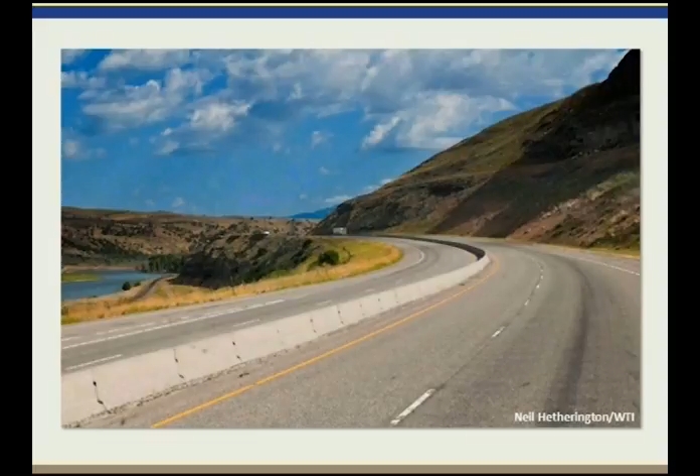There are 4 main ways that roads and traffic impact wildlife populations. Rob's section will mostly deal with number 2, vehicle collisions, and Tony's section will hit on all 4 of these impacts. Perhaps coincidentally, perhaps not, several of these might look familiar to you as key priorities for federal agencies, in that they focus on resource protection and transportation.

Despite their usefulness and arguable necessity, once a road is there, it becomes something to be managed, and it's a challenge to keep negative impacts to resources at a minimum.

Every road building effort affects the suite of species that once relied on that plot of ground. New edges are created with different temperature and moisture regimes and other environmental variables that affect habitat quality for hundreds of meters in some cases.

Every road represents habitat lost and some degree of decreased habitat quality. This is a given, but it's easy to forget as soon as you start cruising down the road. But the regular maintenance and use of roads can also affect habitat quality. Chemical additives, while making for a better ride, can impact wildlife.

Stormwater runoff can carry polluting substances from cars and maintenance activities to nearby waterways, which can affect aquatic organisms and then the animals that feed on them.

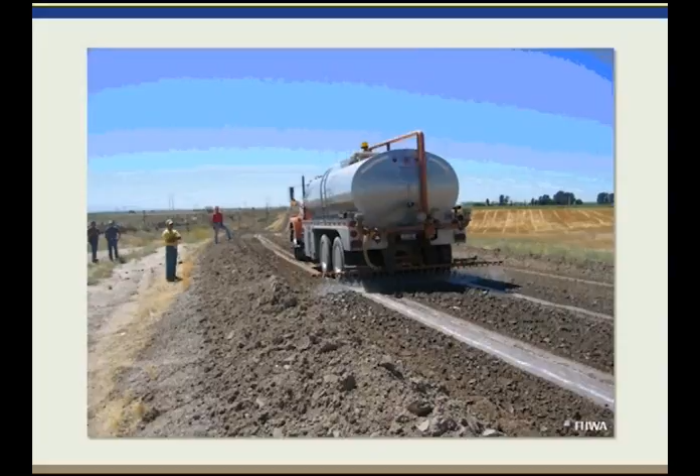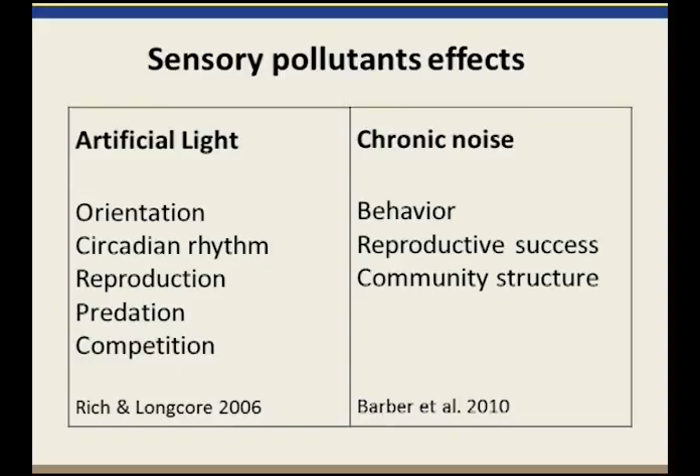No less important to mention are the influences of artificial light and chronic noise. Sensory pollutants can upset natural rhythms and biological processes. And even when alternative modes of transportation are used, the road still needs to be maintained at a certain environmental cost.

The second main way wildlife is affected by roads is by collisions. Because it's a pervasive problem for a wide variety of animals, I'd like us to take a moment to get on the same page that countless animals are struck by vehicles every year. We may never know how many, because they often go unreported or nobody's counting. Or even if someone is counting, things can get complicated quickly because of scavenger bias and searcher bias.

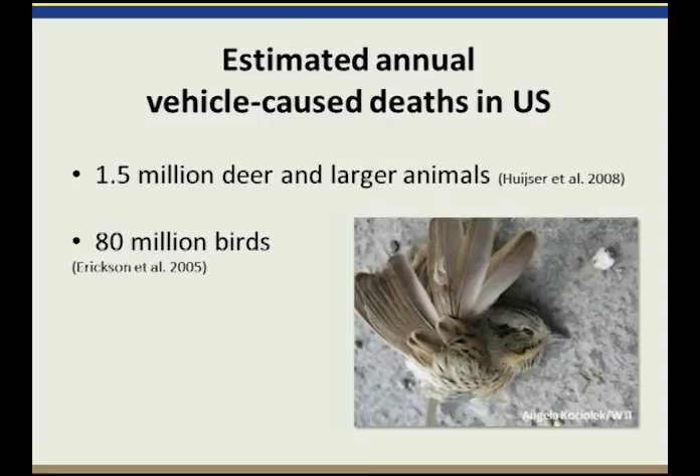Okay, so here's a little pop quiz for you. Can you guess the estimate for how many vertebrates, mammals, birds, reptiles, and amphibians die on U.S. roads per day? Cast your vote if you would. I'll give you a second to do that. Okay, Angie, I'm going to close the poll and show the results.

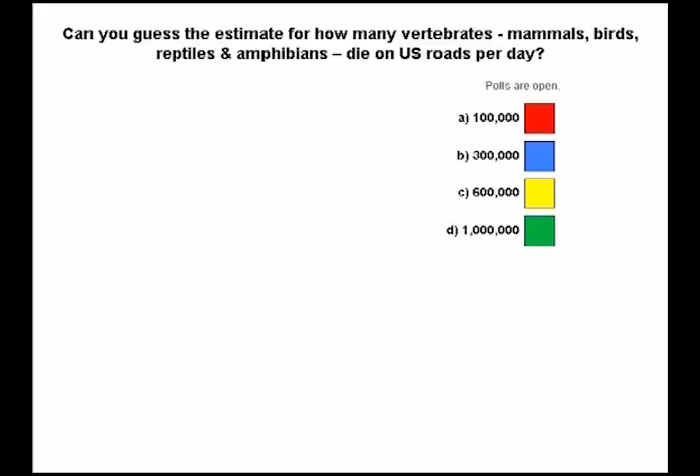Okay, it looks like most of you are pretty optimistic, estimating about 300,000 to 600,000. Okay, Amber, if we can go back to the presentation. But if you guessed D, 1 million vertebrates are estimated to die on U.S. roads per day, then you were right, unfortunately.

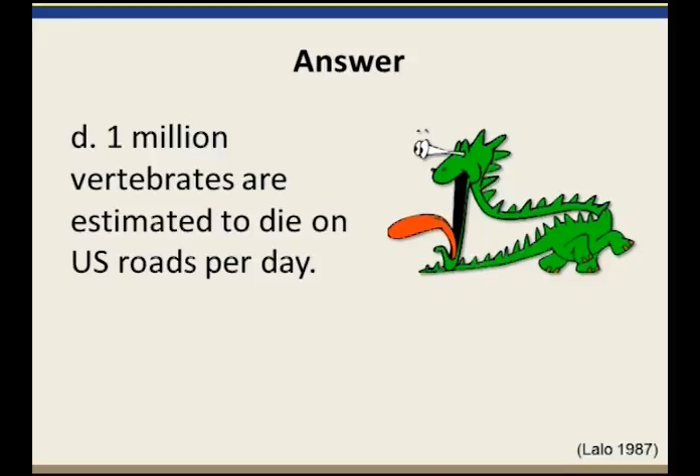It sounds like somebody's having a party. I just want to remind you about your mute function there.

But we may never know how many animals really are killed by vehicles. And does it really matter? Does it matter if animals are killed by motorists traveling through your park, refuge, forest, or grassland? That's a question for you and your agency to ponder.

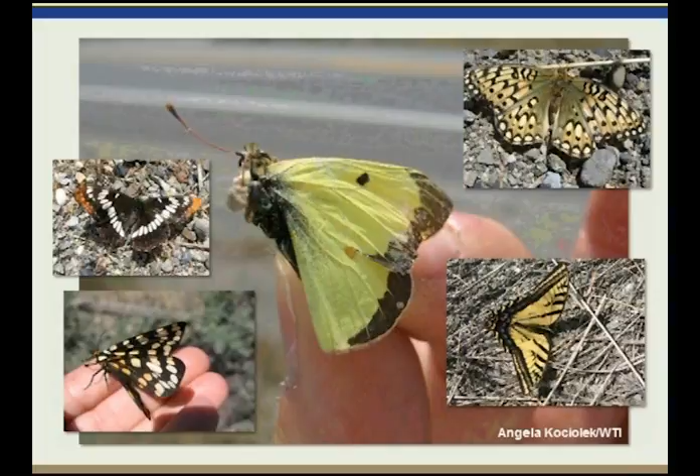The third main way wildlife is impacted is by limited access to resources. Roads help us get where we want to go, but from the wildlife point of view, roads can represent an obstacle from getting from point A to point B, whether it's to access resources or mates, to migrate, disperse, or meet some other biological requirement. Some roads may be physically impossible for some animals to cross due to concrete median barriers, for example. Tony and I did a project a few years ago looking at various barrier types that are used along roadways to prevent or reduce head-on collisions.

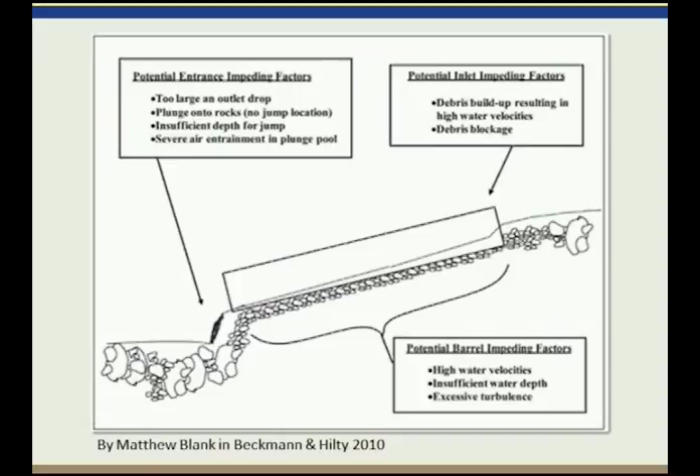The impacts of roads are not only recognized by individual researchers, but the National Research Council of the National Academies have also looked at the issue.

Bringing us to the fourth main way that roads and traffic impact wildlife populations: fragmentation and isolation.

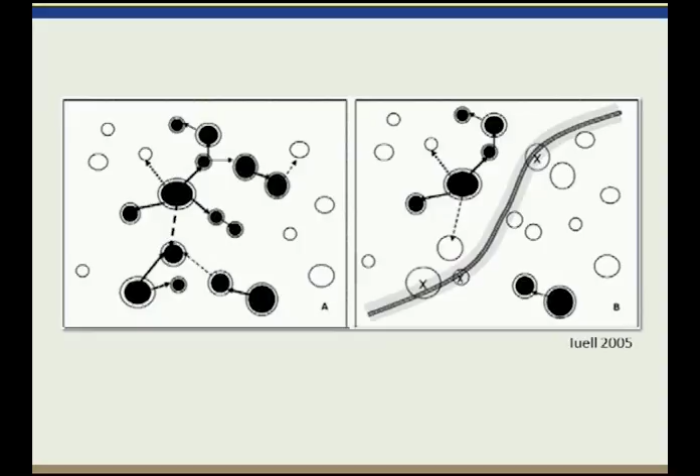Large mammalian carnivores are vulnerable to road effects because of their great mobility and extensive spatial requirements for survival. But small taxa with patchy and localized distributions are also vulnerable to the fragmentation effects of roads.

So these were the four main ways that roads and traffic impact wildlife populations: reduced habitat and habitat quality, vehicle collisions, limited access to resources, and fragmentation and isolation.

So you might be asking yourself, what can one agency do to mitigate the effects of roads on wildlife? If we look at examples from Washington State across the country to Florida, there are examples of FLMAs that are working side by side, or have worked side by side, with DOTs.

In Washington, the Snoqualmie National Forest, for example, is working with WashDOT on the I-90 reconstruction project to benefit all wildlife that live in the corridor.

Big Cypress National Preserve in Florida in years past has worked to reduce panther roadkill mortality. And I'm sure there are other examples out there.

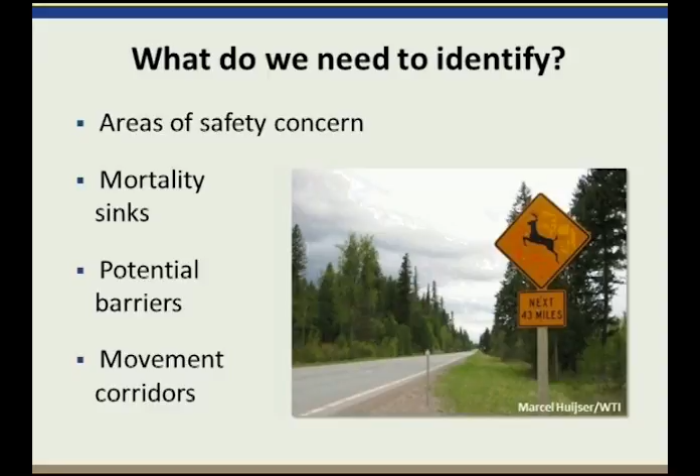This whole issue of wildlife vehicle collisions is always a front page story. I was just talking to my sister yesterday, and she lives in Illinois, and she said there was a big story about wildlife vehicle collisions in her local paper. We tend to see this every year as the insurance industry does a summary.

I suspect you're probably wondering where your state or your land management unit sits within this issue. So what I've done here is give you a few moments on this next slide to see where you sit. This I peeled off the website from State Farm. Last year is the most up-to-date information.

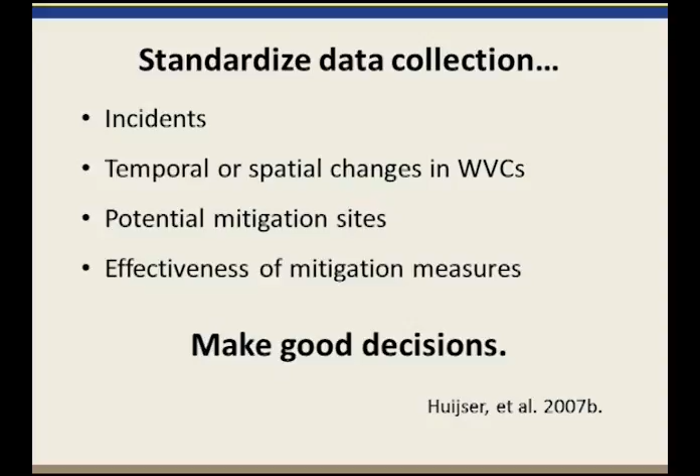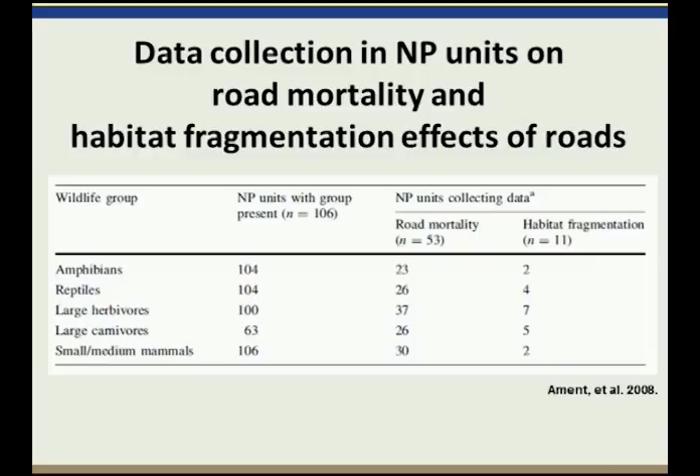So what we are developing is this roadkill observation collection system to improve and standardize the animal vehicle collisions, AVC, and animal carcass data collection, AC. The AVCs are primarily collected by law enforcement agencies or maybe park rangers, for example. The animal carcasses, the dead animals being removed, are primarily collected by maintenance crews. A lot of this information today is being collected on paper and being warehoused rather than entered each year, as we've talked to different agencies. So we do want to collect good, reliable information and data.

This system will be easy to use. We're in the 4th phase of its development. We make it so that you can quick look at your data on your personal computers. It's also automatically stored, so different agencies can share out of the same database once you're granted access.

I'll just show a couple quick examples of how, if you collect good data, you can do a spatial analysis and now a cost-benefit analysis as well, now that we have those numbers. This is what the original unit looked like with the personal digital assistant and the GPS unit plugged in on top. These are all the sponsors of this: Federal Highways, Federal Lands Highways, the Deer Vehicle Crash Pool Fund, which is 10 state DOTs, as well as Washington and Virginia. So there's a very broad interest in getting good information and developing this system.

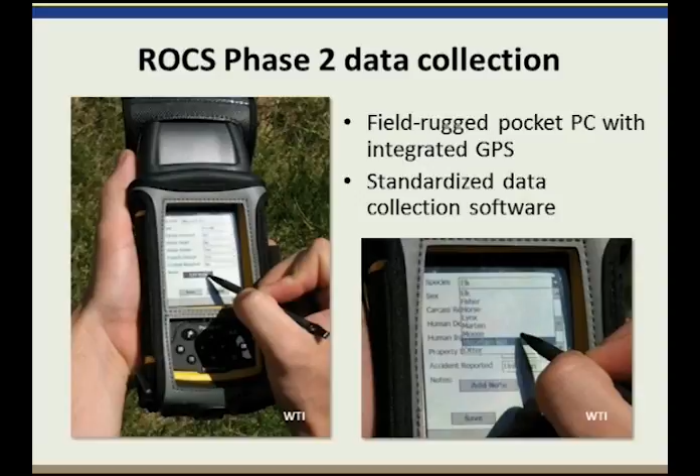The last thing we're doing now is creating a free smartphone app, because those units are $1,500, and when we realized for agencies to deploy broadly it was effectively becoming cost prohibitive. So we're trying to get that same system going, because smartphones have such good GPS. All the data is within 3 to 5 meters instead of the old mile marker system. We're trying to get the app going this year.

This is what it would look like if you came to the ROCS website to look at some of your data. Each of these bubbles is where we had a test unit collecting data. You can go to the website and use the filters, maybe only look at data from a particular year or species, and it will sort it for you. Then you can export it and take it back to your personal computer out of this central server.

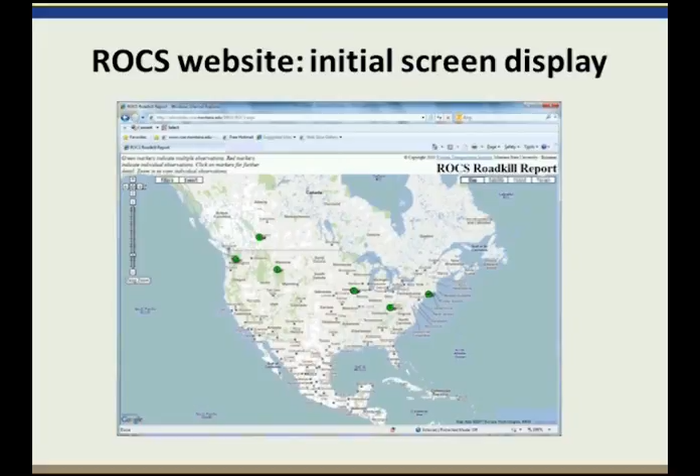This is what a bubble looks like when you click on one of these data bubbles. You'll see this particular one has 6, and you can find out it's all deer. One was unknown, whether it was muley or whitetail, but there were the 6. Then you can zoom in, from that bubble pick an individual observation, and get other particular information about the date, time, sex, and species.

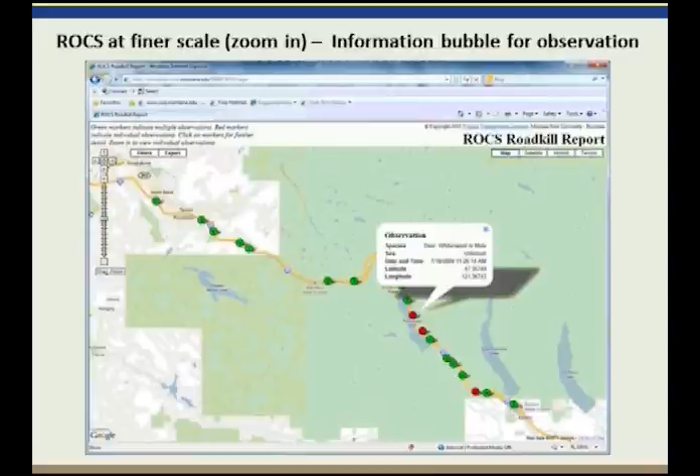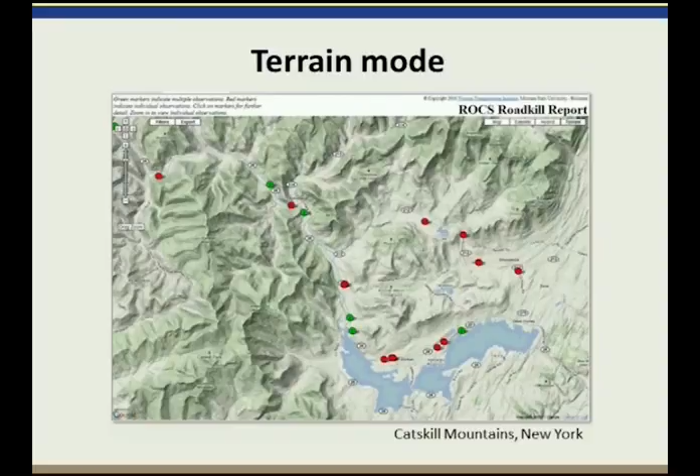The nice thing about the system is it's not only on roads mode, you can have a terrain mode, very similar to what Google Maps would be doing. So you can see if hot spots or high collision areas are where a drainage crosses a road segment, etc. Or you can also use satellite imagery if you're looking for wetlands or vegetation types.

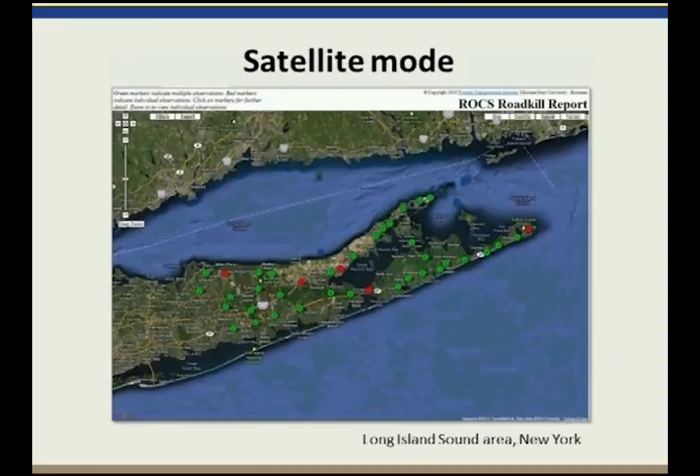Lastly, I want to give you an example. This was one of the field test areas in central Iowa, and you can see they had over 100 data observations in less than a year.

Once you start collecting good data, some people say, well, Iowa's flat and pretty much all road segments are the same. But we did a cluster analysis, and the red spots are where the highest 20 percentile, the top 20% of the crashes, are occurring. If a red spot had something in the next 20 percentile adjacent to it, we added that on. So instead of having to mitigate the entire system of highways through this particular landscape, you can actually pick your places where you're going to invest those limited dollars for mitigation.

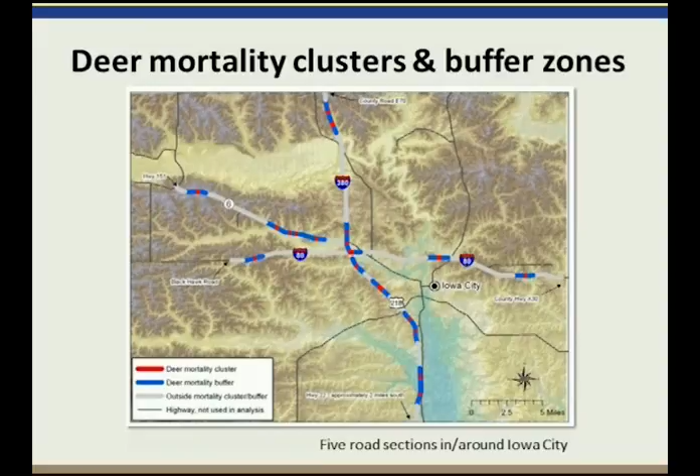You can also look at that cost benefit. This basically took a 25-kilometer segment of one of those highways in Iowa, broke it up into 100-meter segments, and then looked at the costs occurring due to crash rates, and then the costs of the mitigation.

On these examples, it's an animal detection system, a detection system with fencing, underpasses and overpasses, or just underpasses. And you can start seeing where you can justify mitigating, from 50 to 150. From this point to this point would be a good place to invest mitigation to reduce wildlife vehicle collisions.

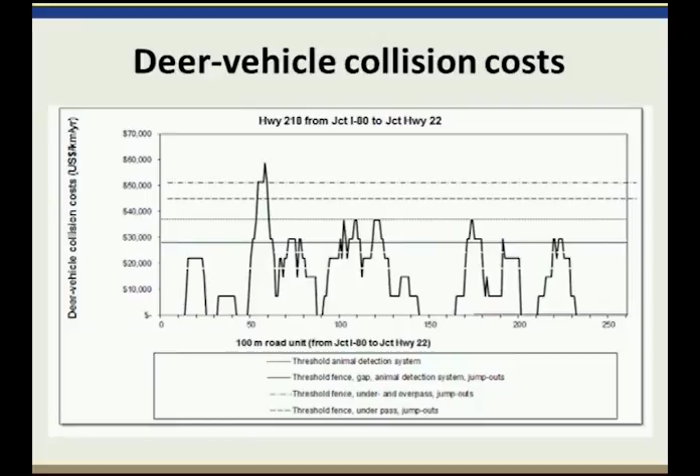The last thing I'd like to talk about is that not only can agencies collect data themselves, but more and more there are becoming web-based data collection systems where you're involving citizens and building awareness at the same time as you're getting good data collection. It builds support for things you might want to do to mitigate that particular road where you're having problematic areas.

The other nice thing about citizen involvement is that they collect not only where roadkill is occurring, the dead species on the side of the road, but also where they're observing live animals. So you're getting areas of the road that may potentially still be passable and safe for wildlife to cross, and you're getting more accurate estimates because your data sets are increasing in numbers.

These are just some examples. Washington is for I-90, just a highway segment. Alberta is also Highway 3, a road segment. The Massachusetts website is for the entire state, and Idaho was for a particular project, though that site's been pulled down now. But basically these sites are showing up all over the country. I know California has a statewide one, Colorado has one for I-70. So involving citizens might be another way of getting good information on where to mitigate for wildlife.

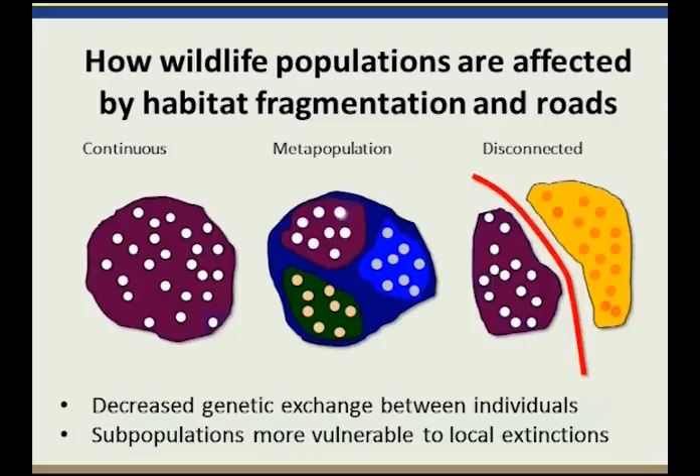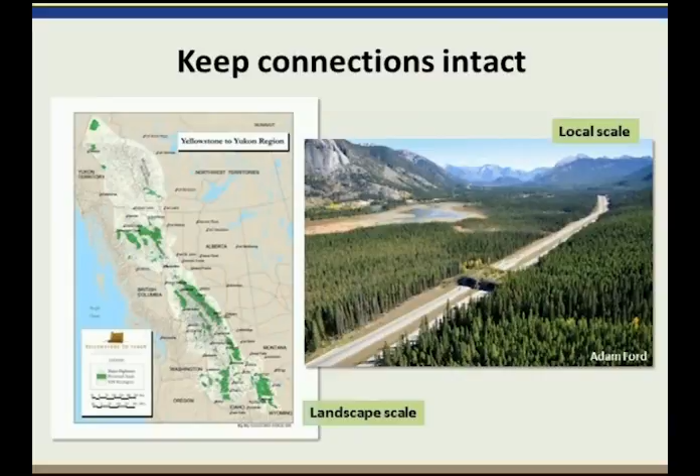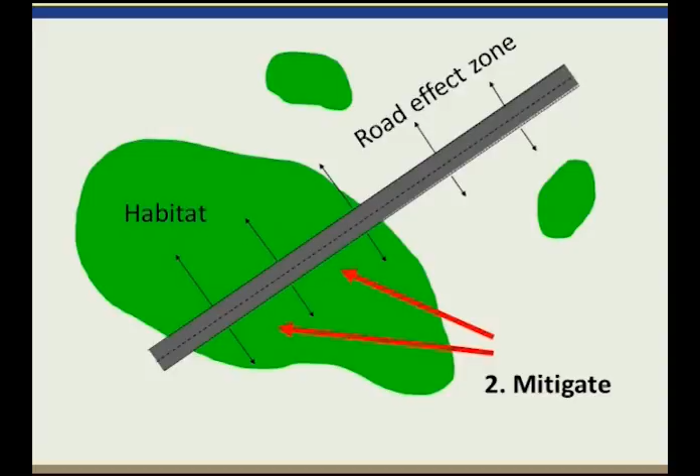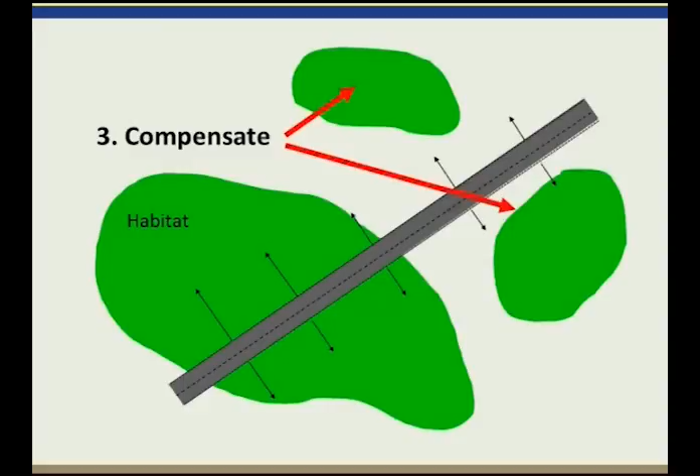Now, mitigating habitat loss or disturbance is certainly becoming quite common. Here would be an example of mitigating with some sort of wildlife crossing structure or animal detection system, and this is really what we'll be discussing from this point on. The last option is compensating—it's another tool in the toolbox, more widely used as it relates to impacts to wetland habitat. The area or extent of impacted habitat is compensated by creating new habitat off-site or adding to existing habitat elsewhere.

So the rest of this part of the webinar will be structured around mitigating roads using wildlife crossing infrastructure. First, where do they go? How do you determine where to place them? Second, what should they look like? Third, how do we monitor performance or use? Fourth, how do we determine performance goals are met? And last, what are some critical areas where we need more information?

So first, placement and planning. When the agency objective is to mitigate for habitat connectivity, as opposed to just reducing mortality on roads, the location where one decides to mitigate road effects on movement should be within a landscape context. You don't want to create crossing opportunities that lead to ecological dead ends—they must connect to a much larger regional wildlife corridor network.

So planning typically occurs at two scales. Project level planning is centered and focused where the specific project is taking place, a given stretch of highway, maybe 15 or 20 miles in length, that intersects with a migration corridor or an important crossing area for wildlife, or has been previously identified in a larger habitat corridor network. This doesn't necessarily require information from a much larger scale; however, if that sort of information is available, it should be used.

Second, planning at the ecosystem level, or the systems level as transportation agencies refer to it, consists of planning highway mitigation at a much larger spatial scale, such as an ecoregion, perhaps an entire state or province, or maybe even a large county. Planning at this scale uses data that identify where key habitat corridors are located. Then, overlaid with the transportation network, we can see where the conflict zones are located and begin to prioritize mitigation actions based on species of concern and/or short-term or perhaps even long-term transportation planning schedules.

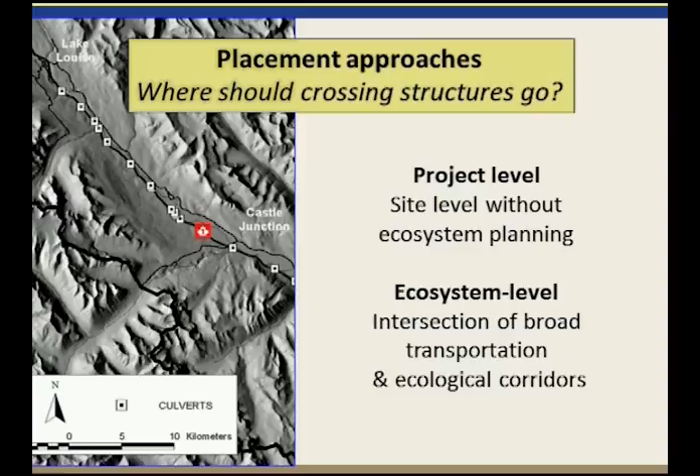Now, 20 years ago, this would have been very time-consuming, but today, given the amount and quality of GIS data that's available, it's a rather straightforward exercise that can be done in a short amount of time.

Some of the planning data and resources that could be used consist of data on the road network, its location and proposed transportation projects, data on where roadkills occur, their frequency and change over time, aerial photos, land cover vegetation maps, and land ownership maps. For identifying wildlife habitats and corridors, wildlife habitat maps or suitability maps are typically used.

For more localized decisions, having field data from specific research or wildlife studies is extremely valuable. If that's not available, then models can be developed that simulate wildlife movements, which allow for identifying where these conflict zones occur between roads and dispersing or even migrating animals.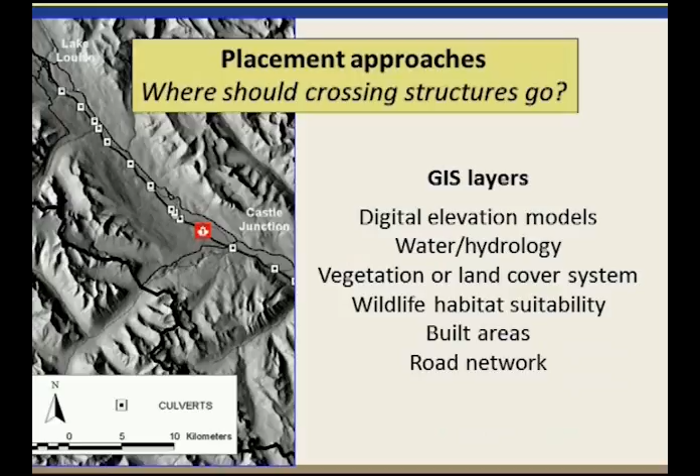When planning the placement of new roads, it may be difficult to avoid the key habitats, but the next best thing is to minimize their impact on habitats and wildlife populations. We can do that by placing roads in areas that impact the least amount of habitat and wildlife movement.

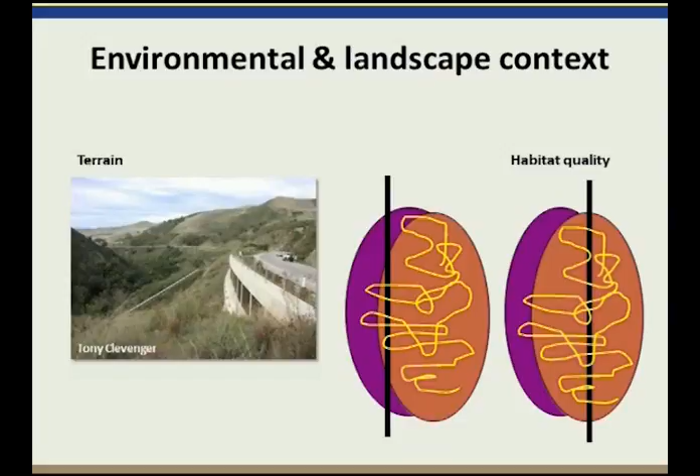Now on to how we determine where crossing mitigation should go. Oftentimes agencies need to make decisions about where to mitigate in a matter of months, maybe just 4 to 6 months. This doesn't really give you a lot of time to carry out a full-fledged wildlife study targeted at determining where certain species are crossing the road, where these key habitat patches are.

So like the planning resources that I showed earlier, fortunately there are a number of types of data and methods that can be used to help guide mitigation planning and decision making.

Field data on where animals are killed on roads is really a basic first place to look, as Rob mentioned earlier. However, relying entirely on where animals are killed on roads may not tell you where animals are able to cross roads successfully. We've been able to show from some of our research in Banff that the two locations aren't exactly the same.

So it's best to supplement roadkill data with information on how and where animals move within the focus area. Observations of wildlife crossing roads or high-resolution tracking data from GPS-collared individuals can help pinpoint crossing areas, and areas with abundant snowfall are ideal for collecting road crossing data from winter road surveys.

GIS-based models are commonly used today to simulate animal movements at a project scale and even a much larger landscape scale. And if there isn't any data available, then there are still some useful methods, including movement models developed from expert opinion, rapid assessments of crossing locations obtained from stakeholder meetings, and don't ever discount the importance of local knowledge and information from people that have lived on the land there for decades.

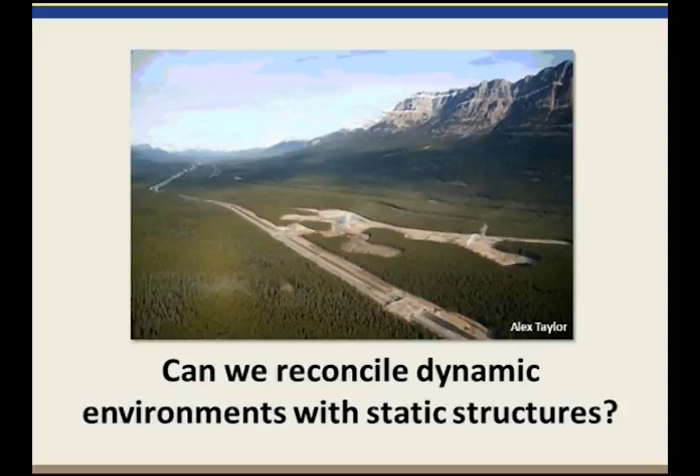Some basic principles regarding planning of crossing mitigation: First, topographic features. Mitigation should be placed where movement corridors are associated with dominant topographic features, such as riparian areas, and in arid areas, probably ridge lines and riparian areas.

Second, multiple species. Crossings should be designed and managed for multiple species, unless there's a focal species of certain concern. Third, adjacent land management. Transportation and land management agencies need to coordinate in the short term and the long term. If it's a federal land structure, that agency needs to coordinate with the state DOT, and vice versa. If the federal agency is managing for regional scale habitat connectivity, it should be coordinating with the state agency about cross-highway mitigation.

And last, the larger corridor networks. These crossing structures must connect to and be an integral part of a larger network and not lead to ecological dead ends.

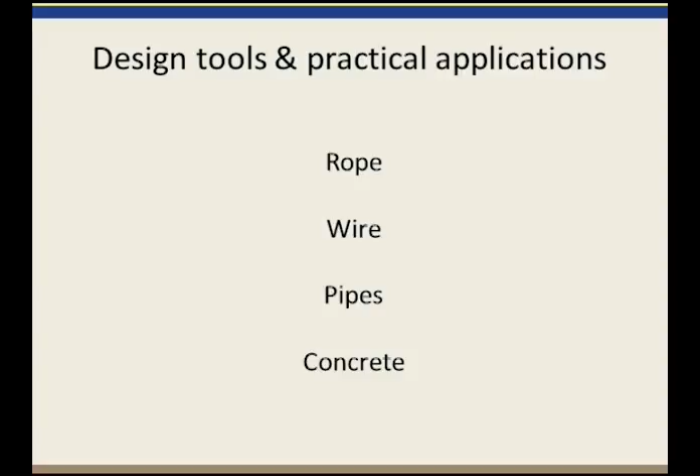The next section is on the design of crossings. Crossings can be made of a range of materials: rope, wire, pipes, concrete, steel. We can divide crossings into two types: overpass designs and underpass designs. We've identified 11 types of crossings, consisting of 4 overpass design types and 7 underpass design types. These aren't designed for fish, but for all terrestrial wildlife, from voles and red squirrels to moose and grizzly bears.

In these next few slides, I'll go over some of the designs and describe some important components. There's not enough time to go over all of the 11 different design types. First, wildlife overpasses. These are some of the largest crossing structure design types, with widths from 100 feet to over 300 feet wide. The goal of vegetating these overpasses is to have the same type and amount of habitat on top as you have on the edges, or the habitat they're trying to connect.

The depth of soil can limit what type of vegetation grows on top. Soils typically range anywhere from 3 to 6 feet, though they could even be less than 3 feet if vegetating with shrubs and grasses, if that's really the primary objective.

Earth berms are typically placed on the lateral edges to block traffic, noise, and lights. These are typically 6 to 7 feet high. However, if you had a solid wall, there wouldn't really be a need for the earth berms.

Human use here is usually prohibited, since these are areas where human use or human disturbance should be minimized if you want to really encourage or facilitate the greatest amount of wildlife use. So human activity is generally restricted around these sites.

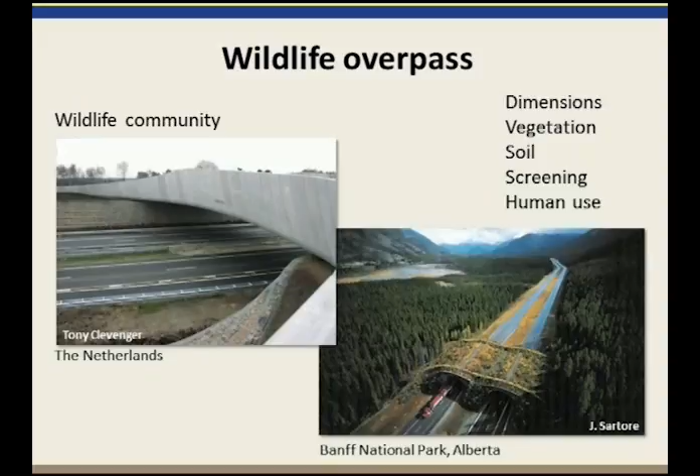They are designed for a variety of wildlife. They range in width from anywhere from 8 feet to over 40 feet wide, with vertical clearances from 6 feet to over 12 feet. Soil is generally placed on the inside of the underpasses to provide a substrate for travel. If the underpass is in a strategic position for wildlife use, human use should be discouraged or rerouted if possible.

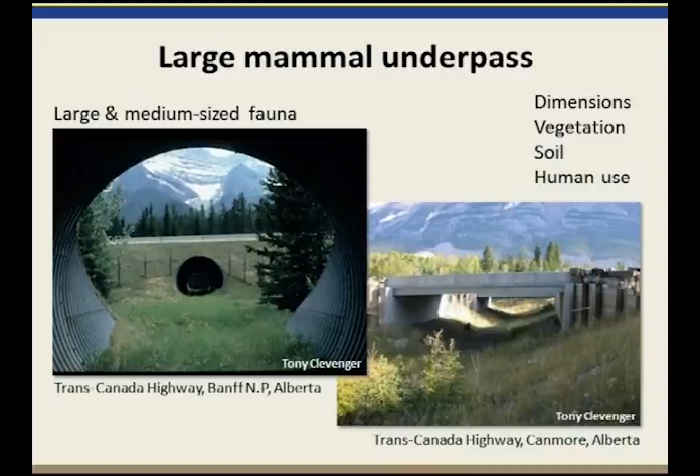Small wildlife, small fauna, need more cover and protection than large fauna, and this generally translates to adding brush piles, anything that you can find, brush and things like that, against the wall of underpasses.

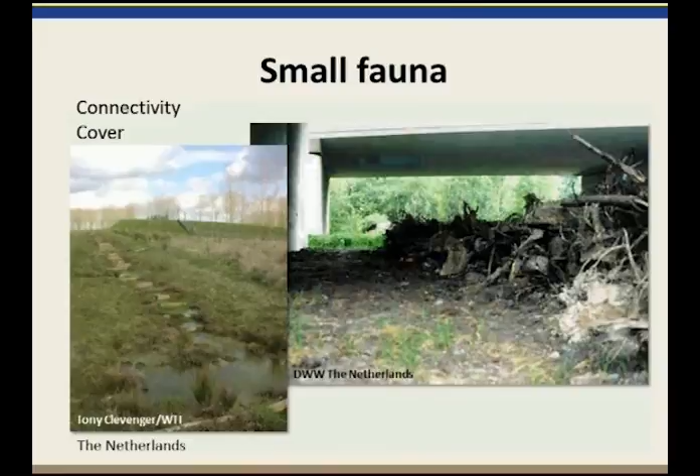There are many types and designs of small mammal underpasses consisting of tubes and culverts. These typically range in diameter from 1 foot to 3 or 4 feet wide. It's important to have vegetation cover near the entrances for these structures to be used. Trying to get any sort of substrate material inside these things is almost impossible unless they're box culverts that are opened before they're actually completed.

Canopy crossings are for arboreal or semi-arboreal species such as flying squirrels, red squirrels, and pine martens. These canopy crossings haven't been used a lot, but they have proved to be effective where they have been placed. They are quite simple, low cost, and easy to construct.

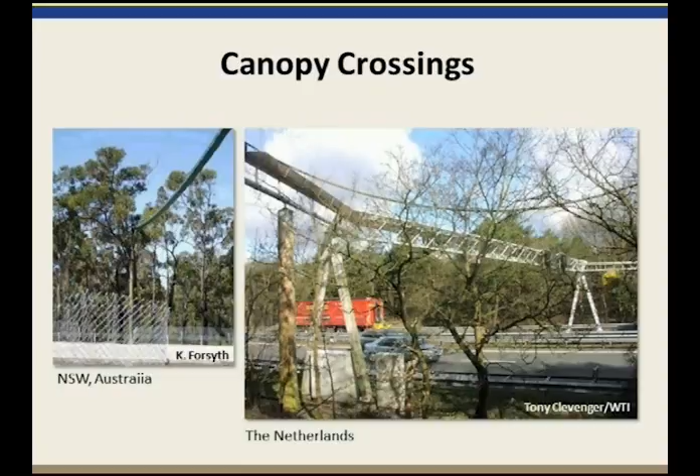Perhaps the most difficult to design for is the amphibian or reptile tunnel. Different amphibians have different sensitivities to light, soil moisture, and humidity. These are reasons it can be really challenging to design the right tunnel for their needs.

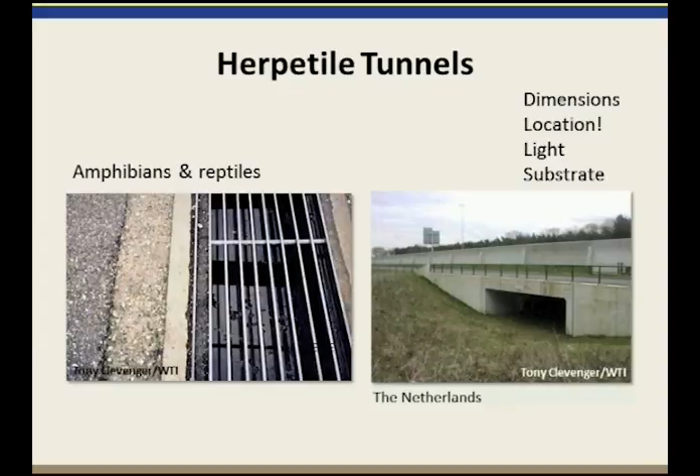As part of a technical handbook on planning and design of crossing structures for the Federal Highway Administration, we prepared guidelines for the minimum and recommended dimensions of the 11 wildlife crossing design types for terrestrial wildlife. We divided wildlife into groups based on body size and movement requirements.

For species specific guidelines, we divided wildlife into 8 groups: ungulates, carnivores, low mobility medium-sized mammals, semi-arboreal mammals, semi-aquatic mammals, small mammals, amphibians, and reptiles.

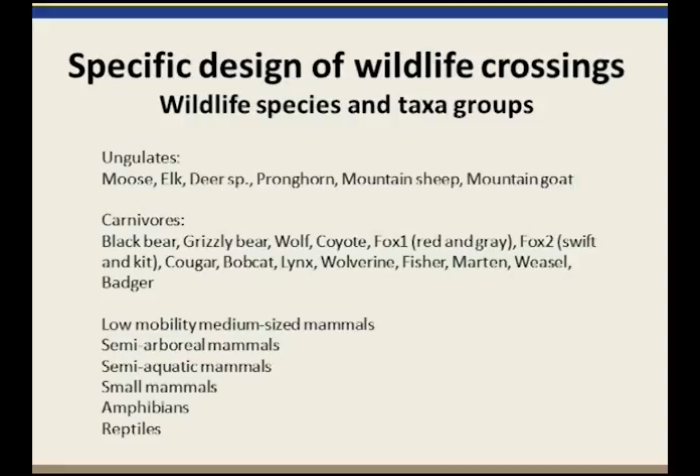So for each of these 8 groups, we classified the suitability of each of the 11 crossing structure design types into the following categories: recommended or the optimum solution, and possible if adapted to local conditions—this is where a large mammal underpass could be adapted for flying squirrel use. It's possible.

The third category is not recommended at all for those particular species. Fourth is unknown, meaning there just isn't enough data or research available to find out how a certain species responds to or uses these different design types. And last is not applicable—for example, bears using canopy crossings. In the guidelines, we also provided species-specific notes to help decision-making and to help best design a wildlife crossing structure for certain species or species groups.

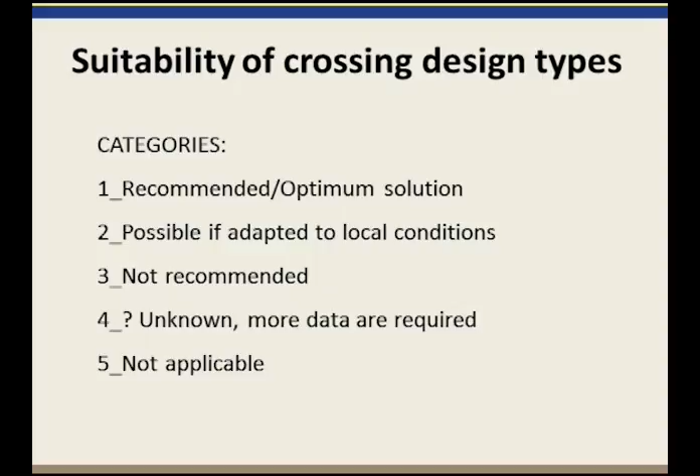Once crossings are in place, it's extremely important that they be monitored and evaluated to determine how well they perform and what might be learned from the design. There are a number of ways to monitor wildlife use of crossings, but first it's important to clearly define what a successful crossing structure is.

The question always comes up: how well does that underpass work, or how well does that overpass work? There's really no general or easy answer. It depends on the performance goals and how one defines a successful crossing structure—whether it's effective at reducing mortality, effective at increasing habitat connectivity, or some combination of both. It might also depend on whether it's focused on one single target species or on an entire wildlife community. Adding more species, wildlife communities, makes the answer more intangible and complex, and later I'll talk more about evaluating crossing structures.

A stellar example of performance goal setting was done by WSDOT and the U.S. Forest Service for the I-90 Snoqualmie Pass East project in the Cascades. This section of I-90 bisects state, federal, and private lands. The project goals were to maintain or restore ecological connectivity in this area impacted by the I-90 corridor—not just wildlife use, but ecological connectivity, including terrestrial connectivity for wildlife as well as hydrological connectivity, meaning surface and subsurface water flows.

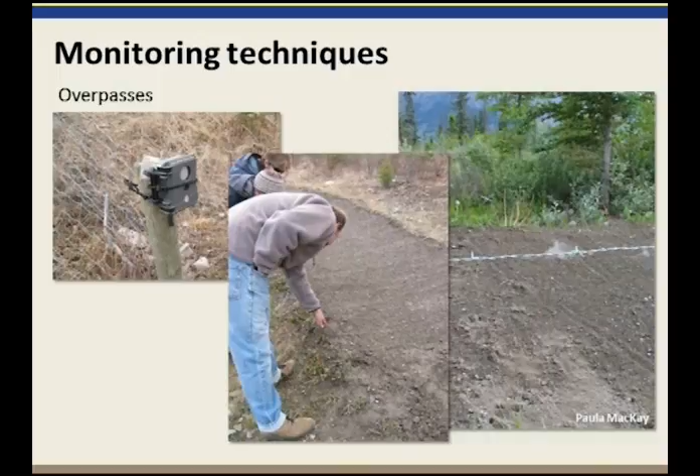For underpasses, it's really the same techniques as overpasses: remote cameras, track beds, and barbed wire if more complex questions are being asked about population level benefits. Track beds are really the cheapest and most effective method at underpasses because they're protected from rain and snow. However, it requires somebody to be out in the field every 3 or 4 days to check the underpasses, collect the data, and rake the track pads. So there's the added cost of being out there regularly, as opposed to cameras, where you typically go out every 2 to 3 weeks to change the compact flash card and make sure the batteries are still working.

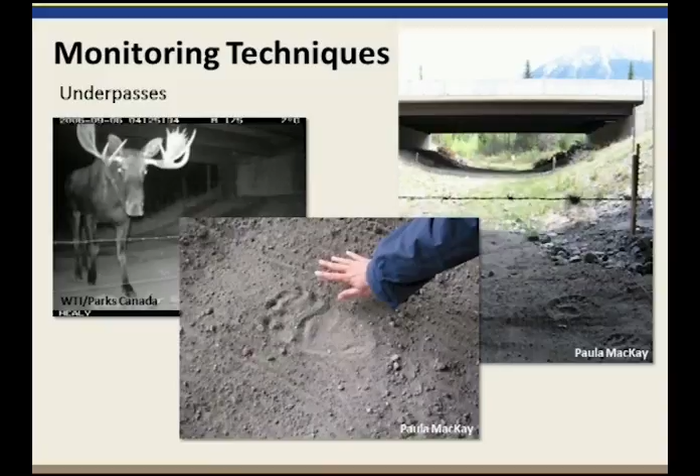State Route 260 in Arizona is an excellent example of a federal land management agency cooperating with the state DOT to build wildlife crossings and invest in monitoring them over the long term. Arizona DOT worked closely with the Forest Service not only to get the wildlife underpasses built, but to turn the monitoring into one of the most successful projects in North America today. The same is true on US 93 in Montana, where the Salish Kootenai tribe is monitoring over 40 crossing structures built by Montana DOT on reservation land.

For small mammal underpasses and culverts, infrared cameras are commonly used, as are sooted track plates placed at both ends inside the culvert, checked typically on a weekly basis. You can also use mark and recapture of individuals on both sides of a highway with crossings, which also provides information on individual movements through culverts.

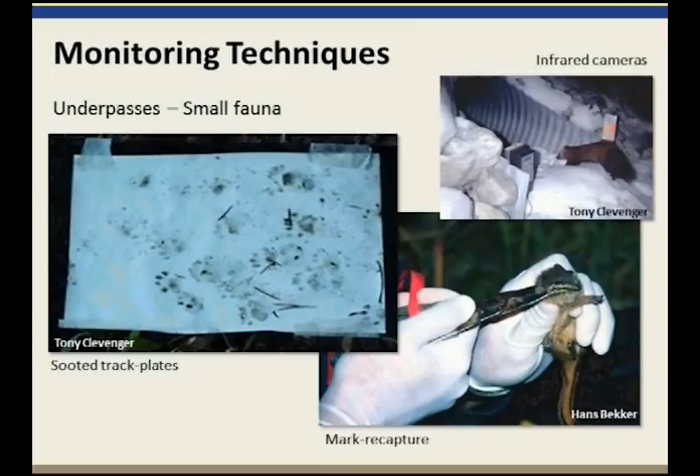So now on to evaluating crossing structure performance. There are lots of ways to determine performance goals. They can be as simple as whether animals are using the crossings, to more complex assessments that might track how ecosystem processes such as predator-prey relationships or rates of herbivory may be affected by highway mitigation.

Land and resource management agencies will have stiffer requirements than transportation agencies. DOTs are often content just to find that the crossings are being used. However, land and resource management agencies often require evidence of more complex ecological relationships, such as whether a species' biological requirements are being met, or subadults are able to disperse using the crossings, and populations being able to recolonize after long absences.

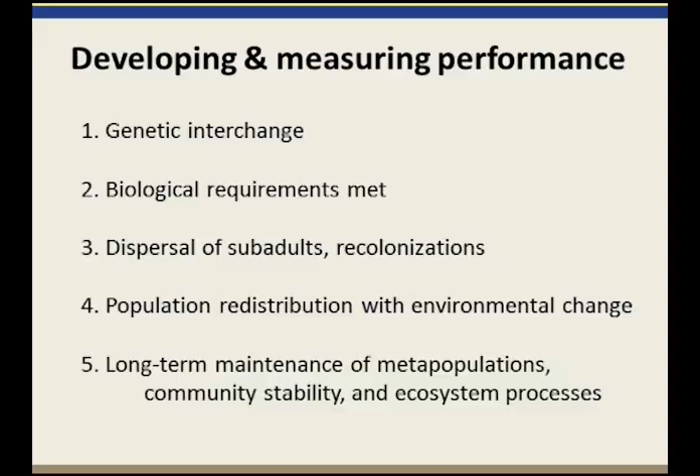Without a doubt, the area that's spent the most time pondering these performance questions is Banff National Park, where I've been leading a research project for the last 15 years. Banff is located in southwestern Alberta, approximately 70 miles west of Calgary. The Trans-Canada Highway bisects the national park, running through the Bow River Valley. The TCH has been mitigated with 8-foot fencing and over 24 crossing structures since 1982.

These highway improvements occur when sections of the Trans-Canada Highway are expanded from 2 to 4 lanes. The first expansion occurred between 1982 and 1988. About 15 miles were widened and a dozen underpasses were installed. This section is called Phase 1 and 2, on the very right-hand part of the graph there.

10 years later, another 12 miles were widened, Phase 3A in yellow, consisting of 10 underpasses and 2 175-foot wide overpasses. The remaining section, Phase 3B, is under construction today and consists of 21 more crossing structures, including 4 200-foot wide overpasses. Banff is unique worldwide; nowhere else do you find as many and diverse types of crossings on a single stretch of highway. Once 3B is completed, there will be a total of 44 crossing structures, 5 design types built over 3 distinct time periods, along with 15 years of continuous year-round monitoring of wildlife use of the crossings.

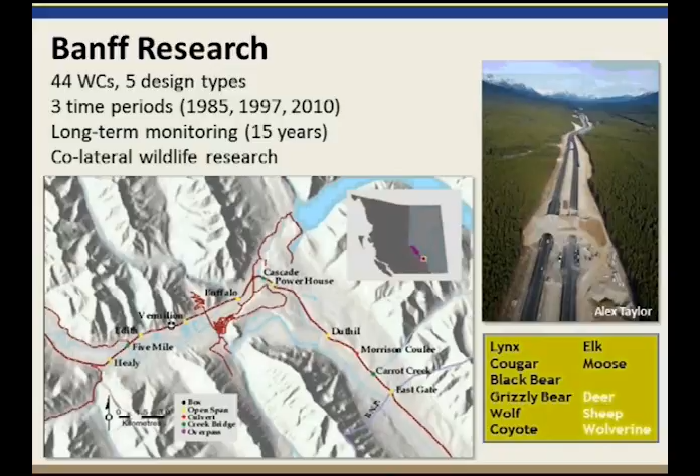We've done several analyses with the multi-year data, and they show that species have preferences for these different design types, even though they can be found using all the types available. Grizzly bears, wolves, elk, deer, and moose prefer using these large open structures, while black bears and cougars prefer the opposite: smaller, more constricted crossings. These preferences really equate to what we know about how these species have evolved, either in open habitats or closed habitats, and also their habitat requirements for travel.

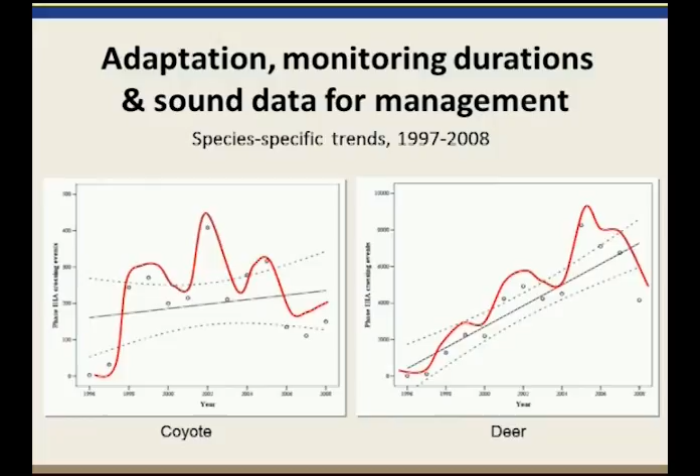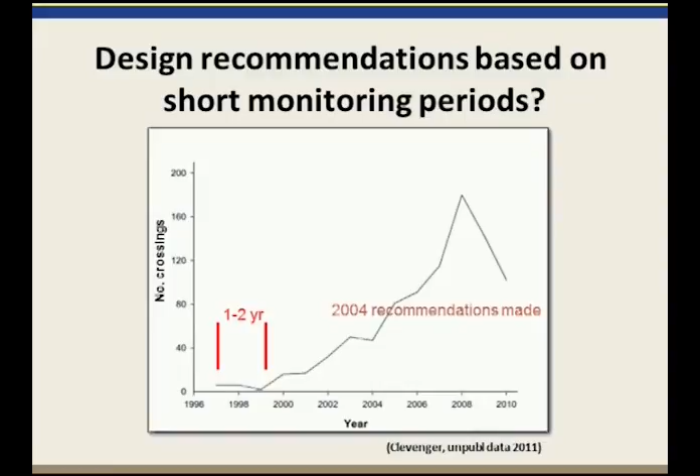Some of the most interesting and really artistic photos were the centerpiece of an exhibit we put together at the Whyte Museum of the Canadian Rockies in Banff. More than 19,000 people visited this exhibit, and it ended up winning a Banff Heritage Tourism Award in 2006.

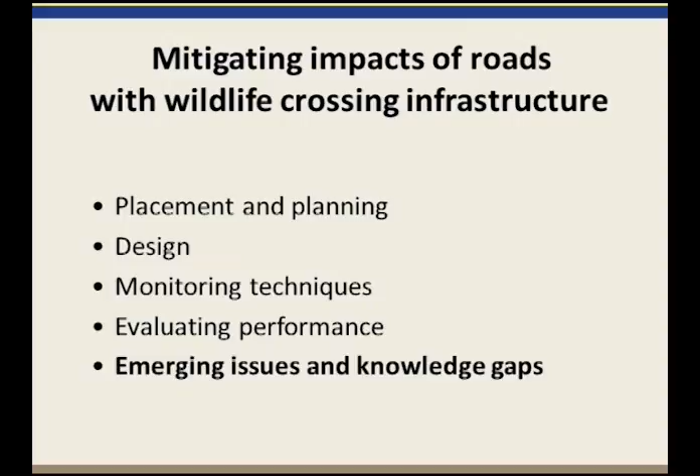Despite these costs, Banff National Park has paid a hefty sum to install wildlife crossing mitigation. 15% of the total TCH expansion cost in 1986 was dedicated to environmental mitigation, crossing structures and fencing. That rose to 25 to 30% of the total cost in 1997. And today's construction cost of roughly $240 million, 40 to 45% is dedicated to wildlife mitigation.

So this is time for a poll question. How many wildlife overpasses do you think are found in the United States today? Just to see what you're thinking out there about how popular these things are, how abundant they are on the landscape.

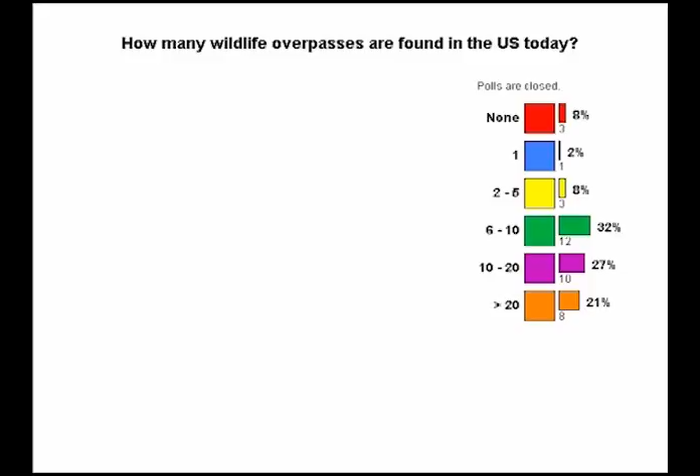All right, I'm going to close the poll and show the results. Okay, well, a third of the respondents are actually pretty close. There are actually 7 in the United States today, so 6 to 10, and about 32% of you guessed that. Almost 50% thought there were more than 10, which could be true in a couple of years, because there are quite a few actually in construction right now. There will certainly be more than 10, 5 to 10 years from now.

Okay, I think there's time. This is the last question and answer, so if you have any questions, I'll try to answer those. And again, any of the presenters are more than welcome to jump in and answer this question.

It says, you stated that most of the WVC occurred on roadways from 1 to 5,000 ADT. That's still a wide range, and 5,000 ADT isn't really considered a low-volume road. Typical low-volume rural roads are in the 400 ADT range. Could you provide more information, such as more about conflicts for 4,000 to 5,000 ADT, and what does the data show for 200 to 400 ADT?

I could go ahead and answer that, Rob, if you want. I noticed that as well. Typically the problematic highways generally range from about 2,000 to 3,000 ADT, and when you get above 3,000 up to 5,000, that's where the more problematic highways are, certainly when we're talking about large mammal vehicle collisions. Not these low volume roads that have less than 1,000 vehicles per day. This range between 2,500 to 5,000 vehicles a day is problematic because there isn't the disturbance effect you get from traffic, like you'd see at 15,000 ADT. So you tend to get wildlife coming to the highway and trying to cross, but at the same time the traffic density is relatively high, making it risky for wildlife to cross at those volumes.

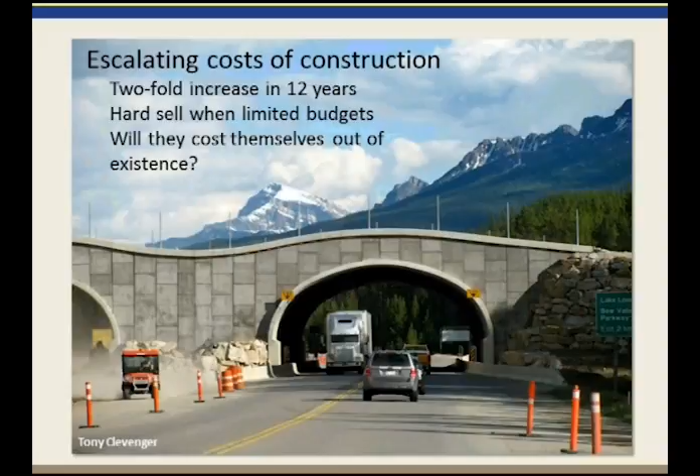So I wondered, could we really build these things more cost effectively? Why don't we get together some bright-minded civil engineers, ecologists, economists, landscape architects, and see if they can generate new ideas and maybe even more economical designs for wildlife overpasses. From that idea came, well, why not have a competition and get a lot of bright people thinking about this? Can we build them differently? Can we build them more cost effectively, and maybe at the same time generate some public attention about crossing structures as well?

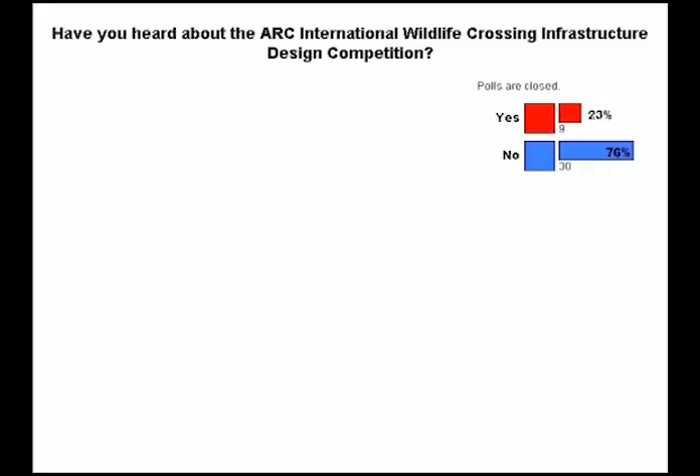This is a competition that happened about a year ago, and we've been trying to share the innovations that have come out of it at a couple of different conferences and newsletter articles and the like. I will be presenting at the TWS Wildlife Society conference next week, and hopefully more of the natural resource professional realm of people will come to learn about the ARC International Wildlife Crossing Design Competition.

So I'm going to share with you the origins and inspirations for conducting the first ever competition of its kind here in North America, the partnerships that formed during the course of the competition, the finalist teams, features of their designs and how they were juried, and I'll close with the overarching theme and goal of the ARC partnership, the pursuit of which continues even though the competition aspect is now over.

So Tony's idea for the competition quickly drew support from the Woodcock Foundation in New York City and the Federal Highway Administration, and WTI contracted services with Ryerson University in Toronto and the Western Environmental Law Center, and we partnered with many other organizations to make the idea of the competition into a reality.

Building partnerships was a key element to the competition, because the partnership building process brought this issue of habitat connectivity to the forefront of our collective consciousness in a whole new and exciting way. It also sparked collaboration and conversations between different disciplines, like engineering and landscape architecture, ecology and design, and also between organizations, both public and private, for the common goal of addressing a massively complex societal challenge of achieving sustainability while maintaining mobility for people and wildlife.

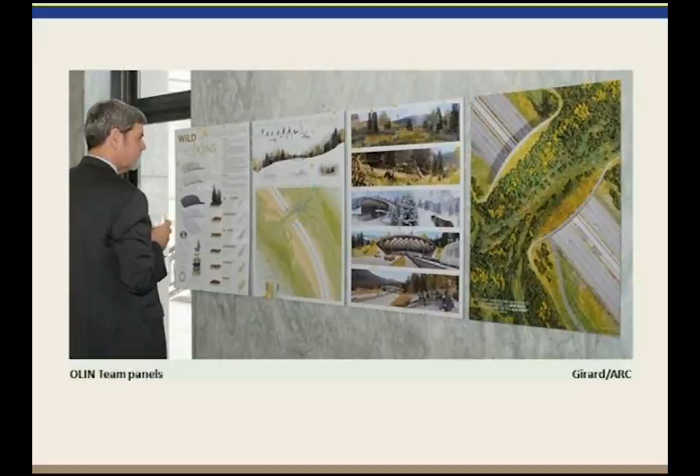The ARC competition sought innovation in feasible, context-sensitive, and compelling design solutions for safe, efficient, cost-effective, and ecologically responsive highway crossings for wildlife. It was a tall order.

In the broadest context, ARC challenged its competitors to reweave landscapes for wildlife using new methods, new materials, and new thinking. Specifically, the ARC competition demanded attention to myriad criteria, everything from safety and load calculations, span and width dimensions that adhere to scientific evidence and legal criteria, to specifications on cost, maintenance, land tenure, and rights of way.

They had to give information about how they would mitigate for noise, light, vibration, and visual disturbances, how they would design exclusionary fencing, how they would work with native habitat, what their target species would be, and where they would place viewing platforms. They were also asked to share ideas on creative partnerships, community needs, and public engagement.

So we have another desktop exercise for you here, where you'll have a chance to hear from the leaders of the finalist teams tell us, in their own words, their approach, philosophy, or unique responses to the ARC Design Competition Challenge.

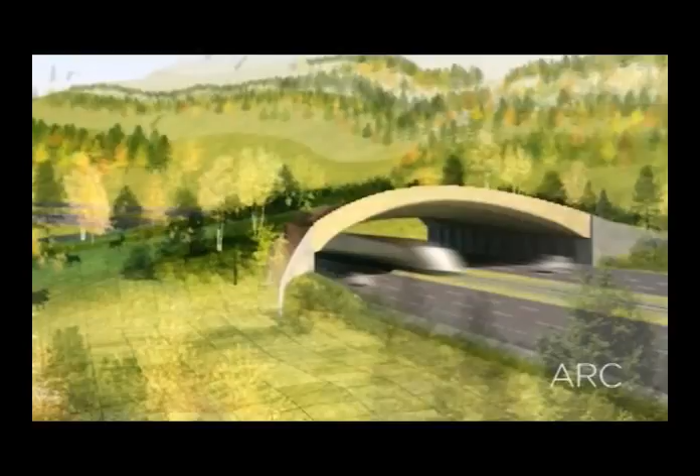We have tried to create a bridge that uses local resources and is sustainable. This low-tech approach, in conjunction with very local available material, needs only a small amount of machinery and therefore energy. So we have a CO2 balance of the bridge superstructure that is either neutral or even positive — the bridge body stores more CO2 than was needed for production.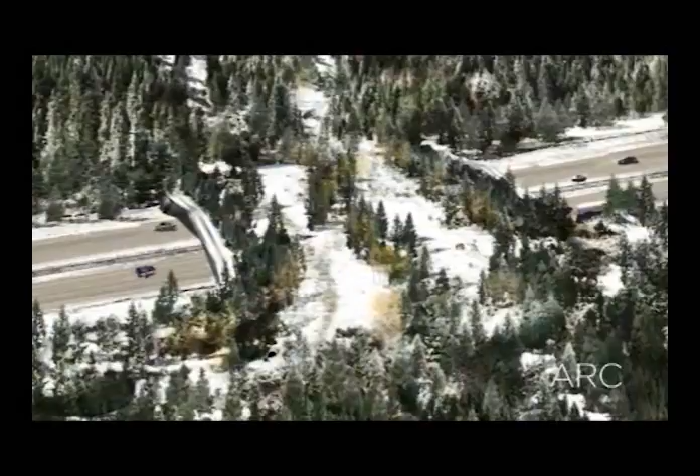Seeing the FAA scurry around to deal with bird strikes gives an indication of how even a much smaller problem can get a tremendous amount of attention. Imagine the value that a wildlife crossing has — it certainly pays for itself many times over, and if you think these costs occur every year, that's $8 billion happening year after year.

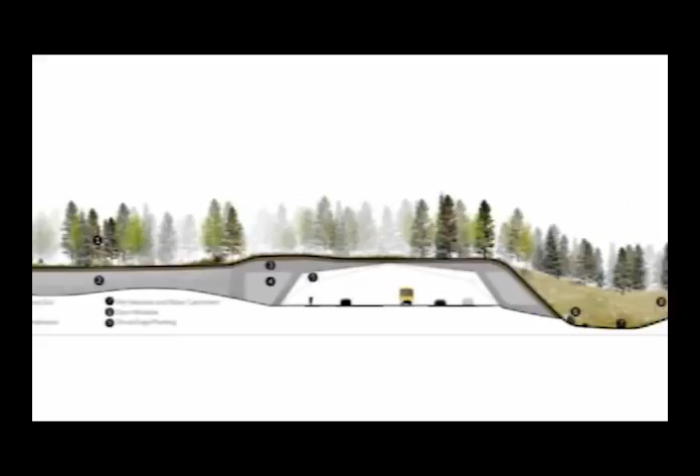Why we're not building many of these wildlife crossings is more the question. If we don't start solving these problems now, I'm afraid they'll only get worse. The other opportunity is to show how successful a wildlife crossing can be at reducing the costs of animal-vehicle conflicts.

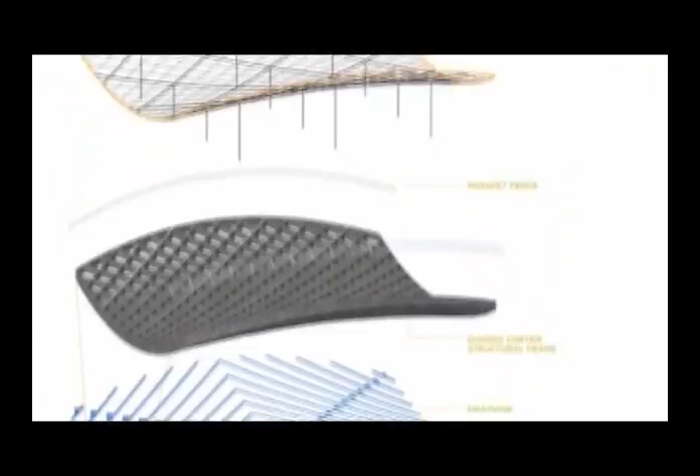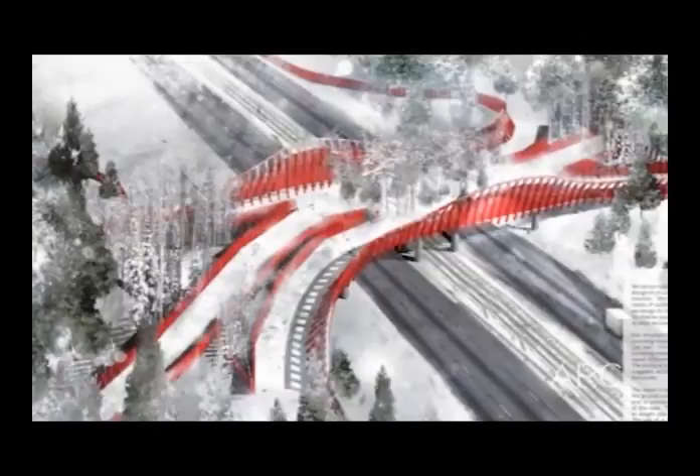I think the unique aspect of the Olin plan is that it is modular and adaptable, not just with regard to the structure, but with regard to the landscape itself, so that our design solution can become the 21st century solution for the federal highway system. That is the excitement of the Olin plan — it deals with two very different systems, one static and one living, but in the context of one form. We pushed the boundaries by creating a very strong icon that we believed would inspire curiosity and help bring recognition to the wildlife crossing.

We did that by using the color red to achieve this, because red is the only color that most animals do not perceive, but that human beings can see. In a way, it's like a secret code by which you can communicate to people that we share the landscape with other living beings, and that beyond these roads there exist complex animal habitats we must be mindful of. One crossing is not enough.

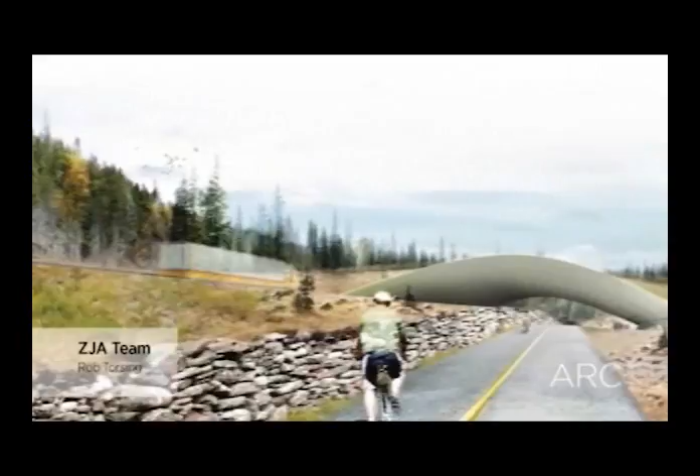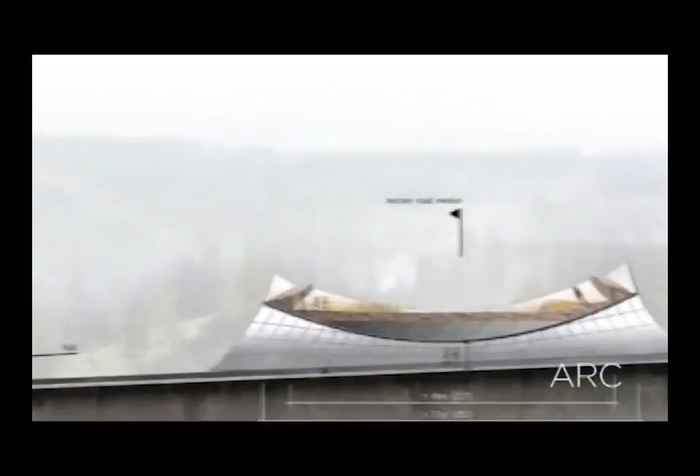You need a network. So we made a solution that is very cost-effective and can be used in all kinds of situations. It's very light construction, with repetitive design elements. It's a parametrical design, so you can reuse all the fabric formwork invented for that. It's a very sustainable solution, and you can use it in many spots.

So the ARC partnership is proud to celebrate the five finalist designs as a collective tribute to innovation in the name of wildlife crossing infrastructure. But every competition needs a single winner, I guess, so the ARC partnership enlisted experts from pertinent fields to be our jury, and they were given complete latitude to decide the overall winner.

While the jury was struck by the quality and innovation of the design proposals submitted by all five finalist teams, they felt that the winning proposal by HNTB Engineering with Michael Van Valkenburgh and Associates was not only eminently possible, it has the capacity to transform what we think of as possible. That's what I think is perhaps the most powerful outcome of our competition, and my hope is that each of you participating in this webinar right now is rethinking the question of what is possible in your area.

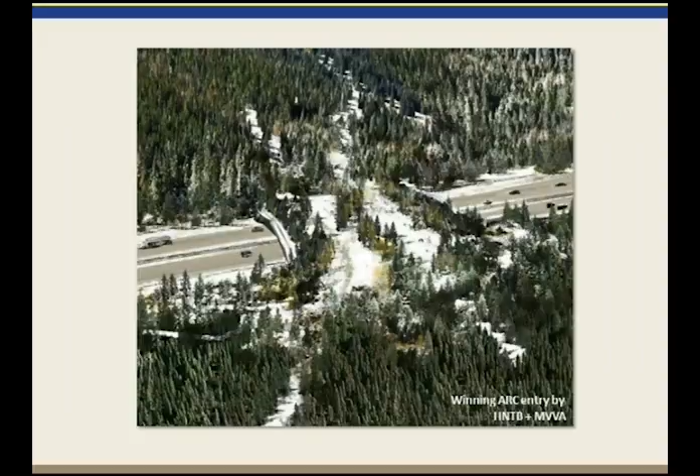So the winning team called their design Hypar Nature, which is a hyperbolic paraboloid vault, and it would look like this. The entire design was based on innovation in precast concrete design.

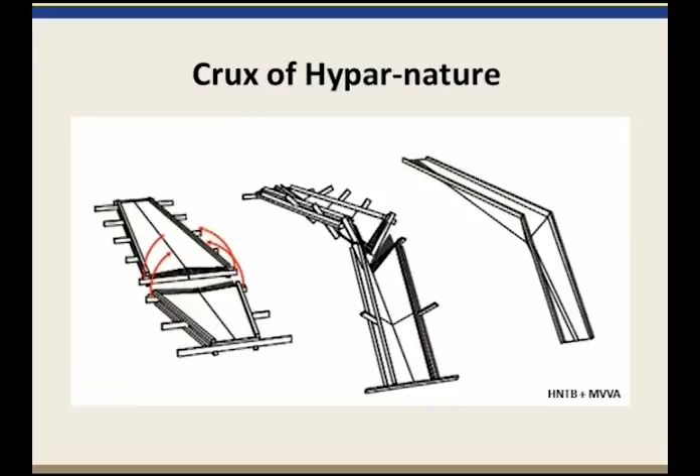It could be created using commercially available straight line formwork as shown on the left. But then what they did was they took those slabs and oriented them in a different way to create a stackable modular form. And this single element is the key to cost effectiveness and speed of construction.

The two modules are joined at the midspan, acting as a three-hinged arch, which would eliminate the need for a central pier under the overpass. So that false work that you see in the center of this photo would actually be removed after construction is finished. And HNTB, the winning team, said that no on-site concrete work would be required, and that the modules are optimized for being efficient to transport, erect, combine, and recombine as needed.

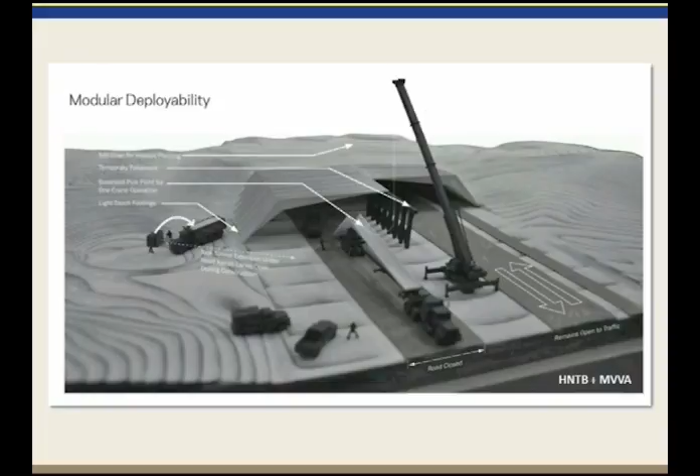And then the same module, if you orient it differently, it could actually incorporate bike paths that are separated from traffic and the wildlife crossing above. So we might be seeing a preview of the next generation of wildlife crossing structure. It might be built along I-70 in Colorado or wherever such infrastructure is deemed necessary.

Several DOTs have expressed interest in the ARC-inspired designs, and we promote the designers and the engineers and ecologists to talk to each other about the possibilities. And I guess the point is that whatever role we play, we should always be thinking of new connections, new methods, new materials, new thinking, and new solutions.

So the ARC competition brought together great minds, as Tony envisioned, and provided the space for creativity on an issue that is often ignored or gets mired in issues of cost and complexity. And now that the competition is over, the mission of the ARC partnership is to strive for implementation of cost-effective wildlife crossing infrastructure to benefit humans and wildlife wherever it's needed.

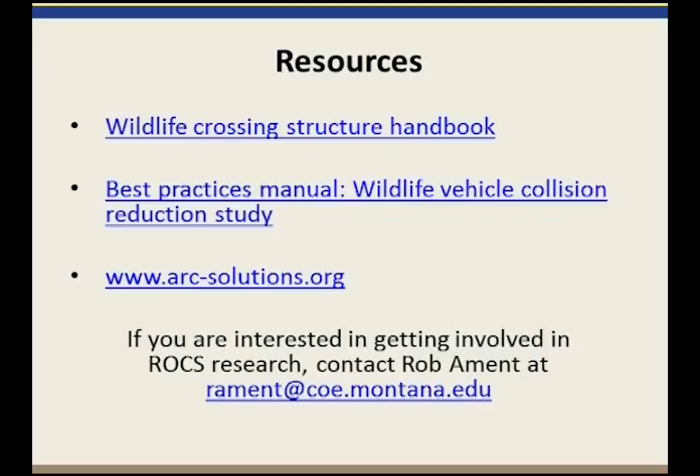Good afternoon. I'm happy that you're all here, and can you hear me? Yes, we can. Good. Okay.

So with the remaining just a very few minutes, I'm going to run through a super brief tour of some other resources specifically for federal land management agencies. These three items: training opportunities, websites, and videos.

The first one is a short course on wildlife and highway interactions, and this course has been offered for a number of years. We will have one in 2012 in August at the Sagehen Creek Field Station near Truckee, California. This is primarily for wildlife biologists, engineers, the transportation community.

We talk about issues particularly pertinent to federal land management agencies. In addition to that, some policy background and funding sources and how to get those projects, those mitigation projects, especially that we want to do, done.

The second training course is called the Eco Highways Workshop. And in this case, we've found that there is kind of a common theme where we have misunderstandings of who's doing what when. So this is an attempt to bring together all of the interagency folks that are working on a project, a highway project development, and get them on the same page.

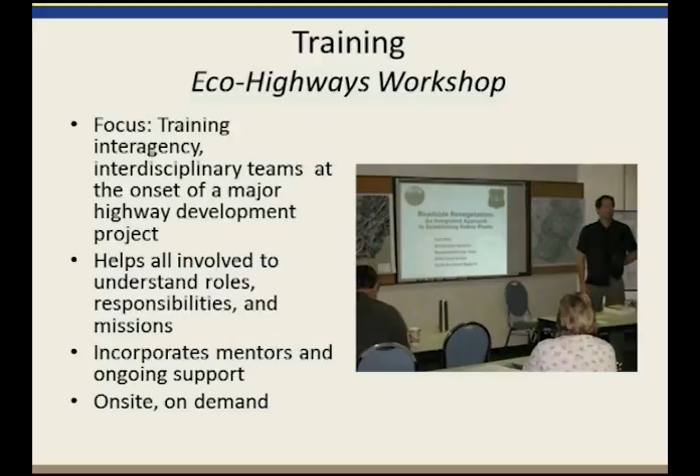We also have two videos upcoming, and we're very near to launching both. The first is a video that Fish and Wildlife Service and Forest Service collaborated on, covering one segment of the Innovative Approaches short course, which is normally a 3-day course condensed into a 1-hour video focused mostly on wildlife crossing structures. A study guide will be available with it too, probably by January. The last thing is a video targeted towards helping employees of federal land management agencies in rural areas identify the highest risk driving situations for deer-vehicle collisions and how to reduce the likelihood of those collisions. That will be available in the coming months.